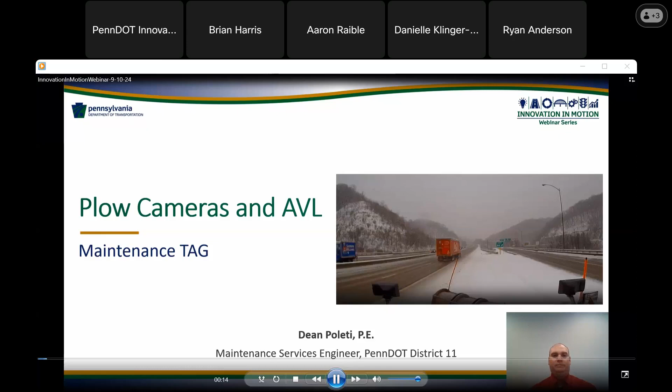Hello, my name is Dean Poleti. I'm the Maintenance Services Engineer for PennDOT District 11, and today I'm going to be giving a presentation on plow cameras and AVL. So our plow camera AVL project was part of the maintenance tag innovation that we started several years ago. The goal of this project was to enhance our AVL system with the integration of plow cameras. It would be to increase real-time situational awareness within our districts, our counties, area command, and PEMA staff. This was implemented in the Minnesota DOT, the Nebraska DOT, Iowa DOT, and many other states.

So back in 2022, 2023, we did a pilot in District 10 and District 11, where we installed cameras in about 40 dump trucks, 3 paint trucks, and 27 assistant highway maintenance manager vehicles to try the technology and try to integrate it into our AVL platform.

The hardware that we actually used came from our AVL vendor, AT&T Fleet Management, who partnered with Smart Witness, who is now Sensata. Sensata Insights provided all the camera equipment that you see pictured here.

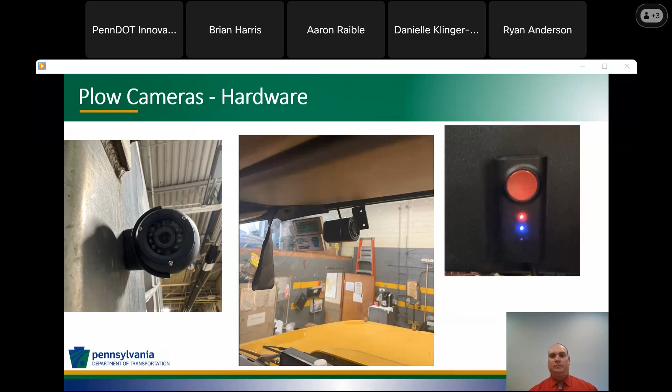This is a screenshot of our AVL platform where you can go into the map settings and view the AVL cameras on your equipment in the district. This is District 11's equipment, and you can see all the different equipment across our 3 counties. The left-hand side shows all the cameras that are online and currently moving in those trucks. You can click on any of these cameras to get a live stream or request video from any of those trucks.

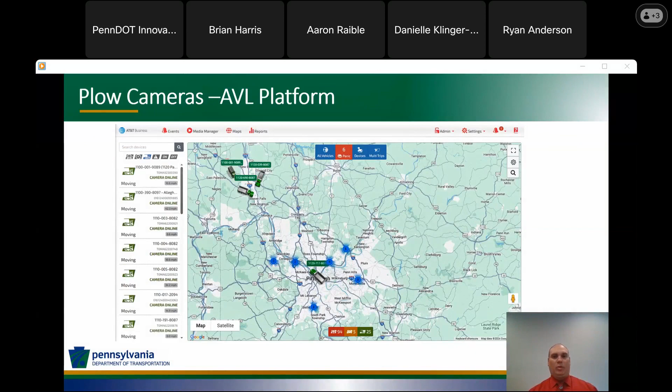Here's a closer screenshot of one of our dump trucks along Route 28 outside the Pittsburgh area. At the top of the screen, it gives you several options: live stream, snapshot, request video, and the history of that particular vehicle. If you click live stream, you get live video right out of the front window camera. If you click snapshot, it takes a photo from the front of the vehicle. If you press request video, you can enter the date and time of a certain video you want from that vehicle, and it sends it back to the media manager for you to view.

So if you wanted to see something from yesterday, you can punch in yesterday's date and time, and that video will be ready for you once it downloads from the vehicle's modem.

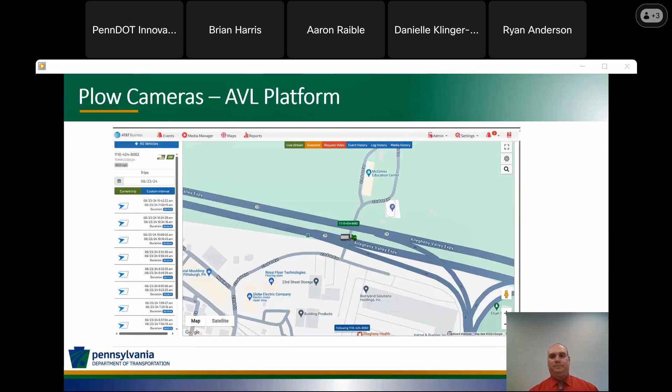Here's a better view of what the live stream looks like. Our particular vehicles in District 11 have both front and rear view cameras, so when you click live stream, you can see in real time what the driver's seeing out the front window, as well as what's going on behind the driver. Here's a different example of just a front view camera.

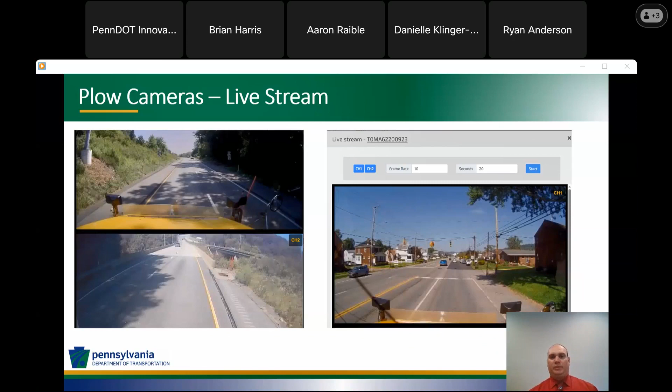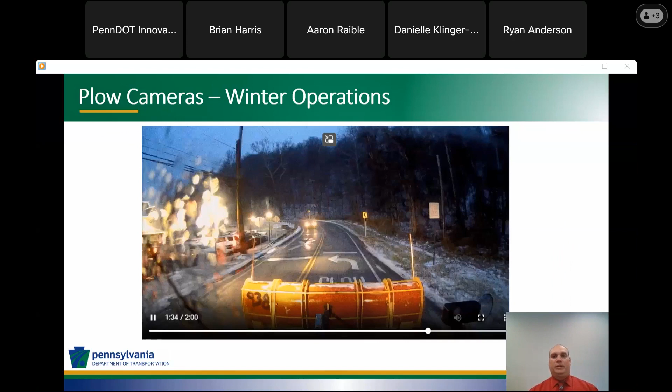We've used these a couple of different ways, mainly in our winter operations. That was the purpose of the pilot program and these cameras initially, to get a good view of what the roadways look like during winter operations. During a storm, you can get a good view of the interstates and interstate lookalikes from traffic cameras, but on secondary routes we don't have any traffic cameras. So the plow cameras give us a good view of what that secondary roadway looks like during a storm event. This is another example of what one of the plow cameras looks like during winter operations.

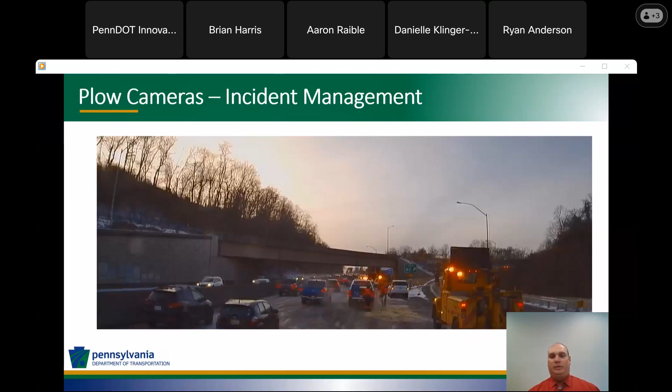Another way we've been using our plow cameras is for incident management. Here's an example of one of our trucks pulled up to an accident scene. We're able to use that as an incident commander to identify what needs are out there, how long it's going to take the roadway to reopen, and to have a better visual of what's actually going on site.

Another thing we did with these cameras was incorporate them on our paint trucks. We have cameras installed on 2 paint trucks in District 11 and 1 paint truck in District 10. We installed a front view, rear view, left view, and right view camera on all 3 paint trucks to try to get a full 360 view of what's going on around that paint truck. A lot of times we have issues where motorists are passing our paint trucks when they're not supposed to, so this is a tool we're trying to use to help battle some of our tort claims.

And our tort liability specialist has been using this program and this software to try to battle those claims for us, to reduce those claims.

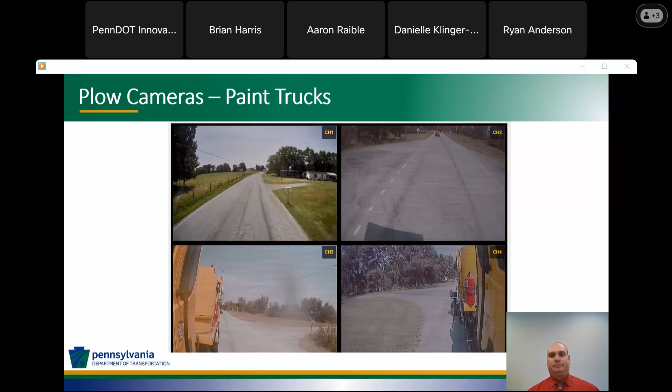This actually helped out our operator, and this is where we get a lot of that operator buy-in, because we were able to use this video to help protect the operator from any claims against him. This operator did not receive any discipline. We were able to quickly investigate the accident, and it helped the entire accident process get completed much quicker.

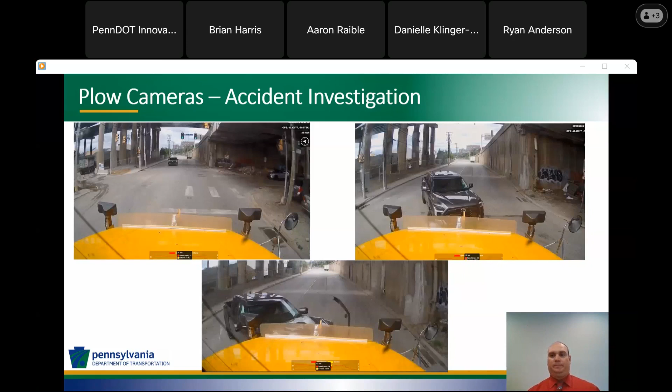Now I just want to talk about some of the results of the pilot project. The cameras worked well in both District 10 and District 11. We were able to get operators on board. We educated our operators at our safety stand-down days to get operator buy-in. AT&T and Sensata modified their platform several times to make the system more user-friendly to get us the system we currently have today. They were great to work with.

District 11 expanded to putting a camera in every truck in Allegheny County, and we're in the process of expanding to every single truck within the district. Hopefully by the end of the calendar year, we'll have a front view and a rear view camera in every single truck.

District 2 is also currently in the process of implementing this in their paint equipment as well. If your district is interested in adding cameras to your truck, you'd first contact Monica Westner from the Bureau of Operations to get the process started. Fleet management would also need to be involved in the modification of equipment, and you also need to meet and discuss with your union prior to installing the cameras.

So where has this been used? Well, throughout the Midwest, many state and county DOTs throughout the Corn Belt have very similar programs. We reached out to over 10 maintenance divisions to ask how they've implemented and utilized their corn. All of them shared their information with us, and every division we talked to wants to continue to grow and expand the program. It's a testament.

The people that are using it love it. They want to keep using it. So locally, we did this as a small experiment on SR 1011 Mount Zion Road in Lebanon County. SR 1011 is a north-south state route, which is very prone to drifting. A lot of open fields, very prone to drifting. This is a site where traditional snow fence has been used in the past.

And this past winter, Assistant Maintenance Manager Joe Coleman and myself, we worked with a farmer to leave corn standing. So Joe and I took time off of work and we handpicked approximately 300 feet of corn so that the farmer could still get his corn. He ran the cobs through his combine. He still got the corn off of it, but we had a demonstration of the stalks and how well they can prevent drifting.

So because the farmer ended up finding out that we were doing this on our own time to try to help the Commonwealth and develop this program, he agreed to leave another 700 feet of standing corn to help demonstrate how effective it could be. Said it was a one-time offer, but we're very grateful that he did that.

So by utilizing standing corn adjacent to traditional snow fence, this past year, half of the stretch that drifts was left in corn. The other half, we have orange snow fence. By utilizing it right next to each other, we could study the effectiveness of the standing corn and compare it directly to the traditional orange fence.

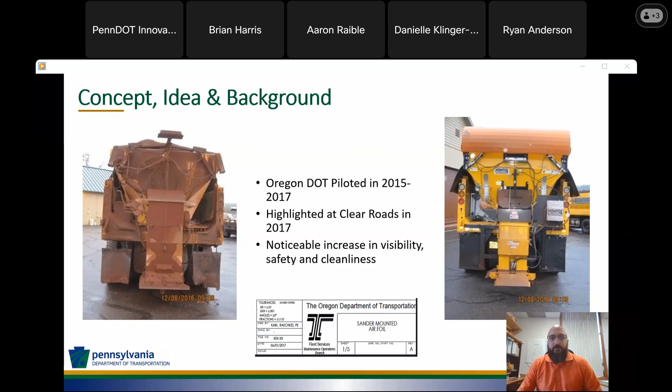When we first discussed this idea, there were some initial concerns up front from various levels of staff. One of the most voiced concerns was, would the air turbulence cause sight distance issues behind the truck as it was traveling down the roadway during a snow event? During testing, we found this not to be an issue. If anything, it assisted with better visibility.

Another concern was, would the cold air being forced down the tailgate cause freezing of the material in the spreader box or spreading issues? During the 2022 Christmas storm, we experienced wet snow and then a sudden drop in temperatures to single digits, and we had no issues during this event.

An additional concern was, could we get buy-in from the operators and would it actually work? Both of these we proved to be successful during the previous 2 winters of testing, to the point operators were wanting to drive these trucks versus the ones without the airfoil.

Fleet management had some initial concerns with safety, and we worked directly with them to ensure we had adequate lighting and safety mechanisms in place in the event that it failed.

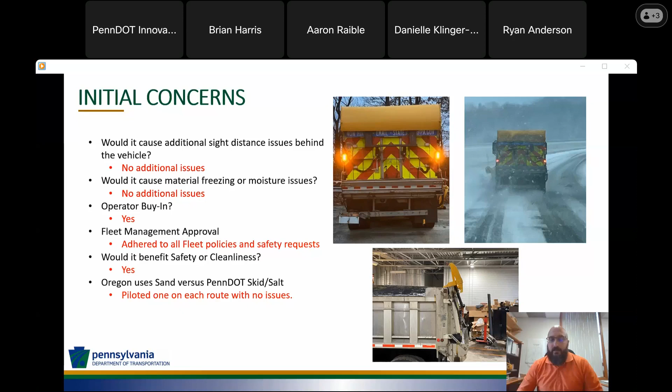One of the biggest initial hurdles we had was Oregon Department of Transportation utilizes a slide-in style of spreaders that the entire unit slides into the bed of the truck, versus PennDOT, where we hang the spreaders on the rear of the truck. Working with our welder and several other staff, we took the original idea and modified it for an initial prototype.

Since the mounting bracket was completely different from Oregon's original setup, we initially went with repurposing the old style brine tank brackets that hung on the tailgates. This not only let us repurpose these into something useful, but also expedited the build process.

We conducted testing during the first winter event, which we had the steel version only. After the first event, we realized that this was actually going to work, and we quickly worked to build another prototype to try out other products such as plastic to reduce weight.

We followed the same build design as the steel, but replaced the curved metal piece with plastic that is commonly used on the front of snowplows. The thought was that we could potentially reuse old plow faces that needed replacing in the future if we went that direction. The downside was that the plastic was significantly more expensive, and there were concerns with it cracking due to sun and temperature exposure.

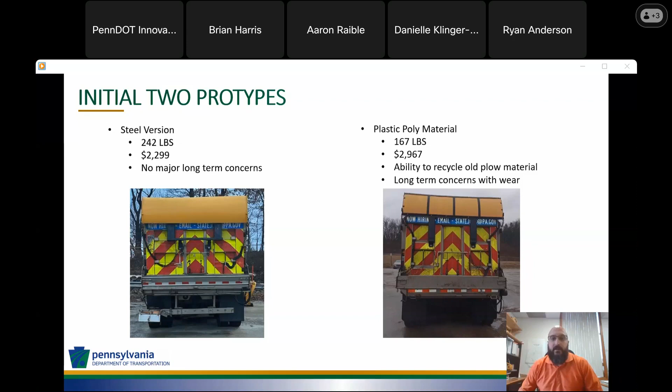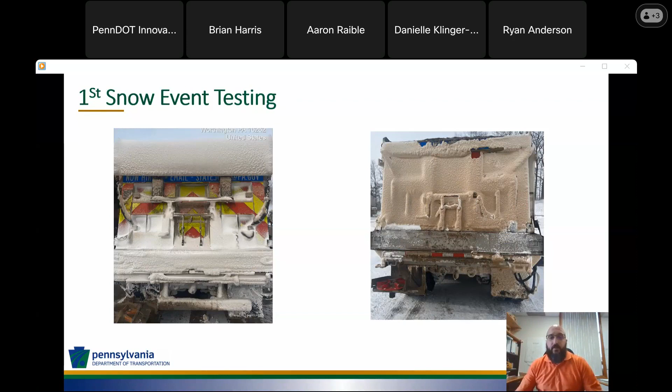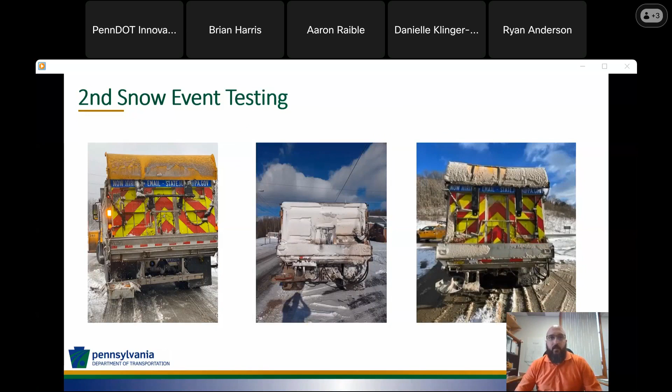During the second and further snow events, we had both prototypes operational. As you can see, after some adjustments, there's a night and day difference in cleanliness and visibility of the units with the airfoil versus without. The operators who ran these units said they typically had to get out several times a shift to clean the tail lights and tailgate off a truck without the airfoil, but with the foil, they ran an entire shift without having to do so. This is not only safer for the public to see us, but also safer for our operators, as it means less time outside the vehicle that could lead to slips, trips, and falls.

During this time frame, we reviewed a lot of accident data for the previous 5 years and found that approximately half of the accidents statewide during winter months labeled as hit-from-behind had references in the accident packets or police reports stating that the public could not see us from behind. There's potential that with this in place, we could reduce hit-from-behind incidents statewide.

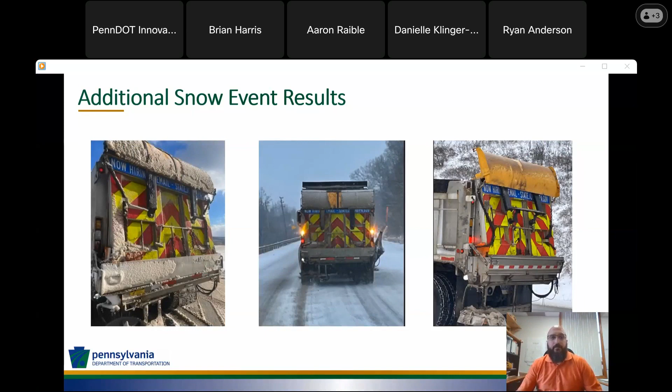After the previous two winters of testing, we worked with fleet management and the maintenance tag team to tweak the first two prototypes into something we could easily roll out at a statewide level if we continue to see success, and also to create our own shop drawings with our internal design folks.

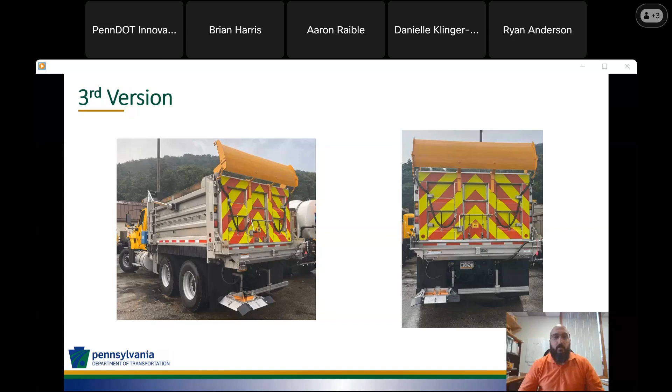We decided to go a little different direction, moving from reusing old brine tank brackets to a more simplistic and lighter version to mount the foil to the tailgate. By doing this, we cut nearly 90 pounds from the original design, which makes it safer to install and easier on the tailgate pivot points. This unit will be operable for the 24-25 winter season to continue the pilot.

So what's next and where are we currently? Right now we are finalizing our shop drawings with the internal design staff out of the district office. Once completed, we'll be able to easily hand these off to other areas to build in-house if they choose to, along with hopefully working with the State Correctional Institute, Forest County, who have already been working with us repairing and building equipment for the department.

We have finalized the third and hopefully final version of the airfoil in Armstrong County and are also going to expand one additional unit in Jefferson County on Interstate 80. Once this is completed, we will currently have 4 pilots running in District 10 for the upcoming season, covering everything from a 4-digit low ADT route to Interstate 80, to maximize exposure and operator feedback.

We will also be finalizing a one-page white paper that will accompany the shop drawings with any additional relevant information. And finally, and most importantly, we'll be working directly with our fleet management folks on final approvals and feedback.

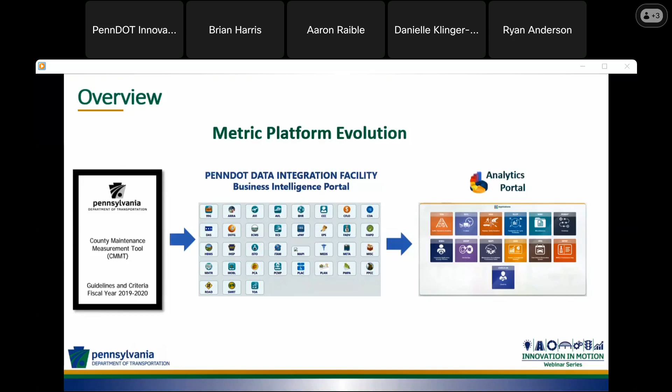Here's a look at our applications when entering the analytics portal. As you can see, this was designed for all areas of PennDOT to house their metrics for analysis on their specific business area. Let's take a look at MAPI.

The MAPI Core Team is responsible for the overall administration of the MAPI program, final authorization on program changes, performance measurement, monitoring organization advancement, and supporting personnel development, while also institutionalizing core maintenance activities and the principles of central business goals.

The MAPI Advisory Committee is meant to provide advice to the core team and focus areas and recommend revisions to the MAPI program.

The MAPI focus areas are responsible for metric reporting and identifying solutions to attain metric target values if unmet.

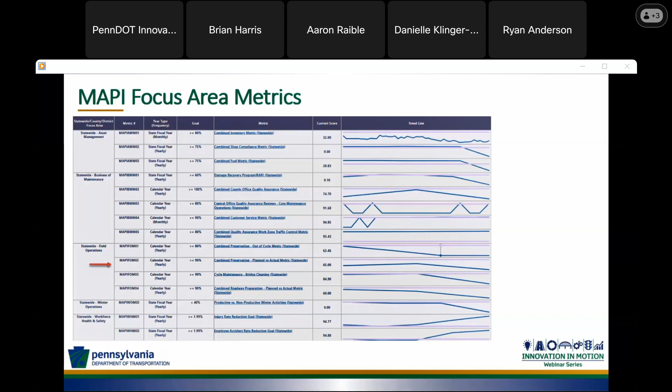FOM02C, which stands for Field Operations Metric number 2, and the letter at the end means it's part of a series of contributing metrics, and its individual score contributes to a combined metric score.

Which measures if the initial plan was revised, to what extent was it revised compared to the initial.

All metrics have a detailed report area where you can drill into the data to further examine and view source system information as either part of a scoring or data integrity analysis.